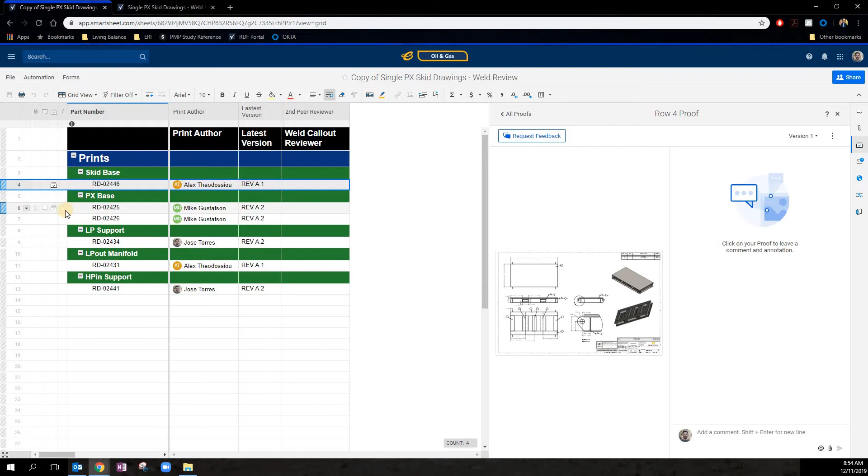We can do that by clicking here. We have these taskbars that open up. We can either upload a file by navigating to it directly. So this is my projects folder. I'm going to go on general projects, SPS drawing pack, and for that one I think that was 2446. So I've uploaded 2446. Let's say I also want to upload 2425.

I can also do this by dragging and dropping. Let me get my windows here straight. So here, while I select this row, 2425, I'm simply going to drag and drop here.

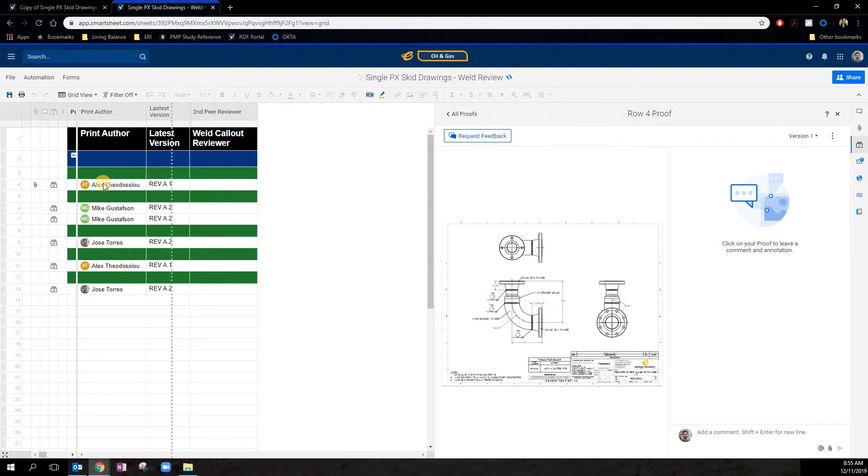So we can continue this process until we have uploaded all of the proofs or drawings that we need to review, and that's what I have here in this sheet. We see that each row can only have one drawing, and that's fine, that's all we need. This drawing has 2 pages, so it will also upload those 2 pages nicely.

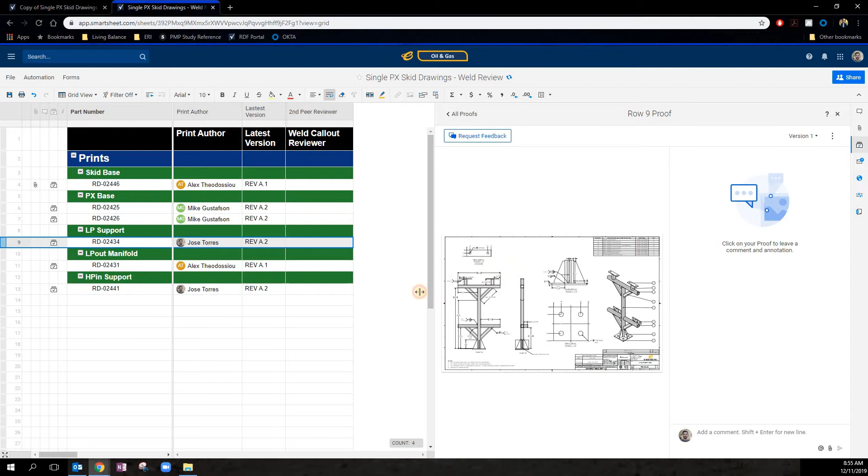Okay, so now that we have all of our drawings uploaded here, we need to start collaborating. In the first case, I'm just going to share this entire sheet with someone and ask them to peer review all of these drawings.

So I'm simply going to control copy. You can share sheets by copying their URL. I'm going to come here to my Outlook, start a new email. I'm going to email myself just so I get it. jtorres at energyrecovery, proofing request, please and thank you.

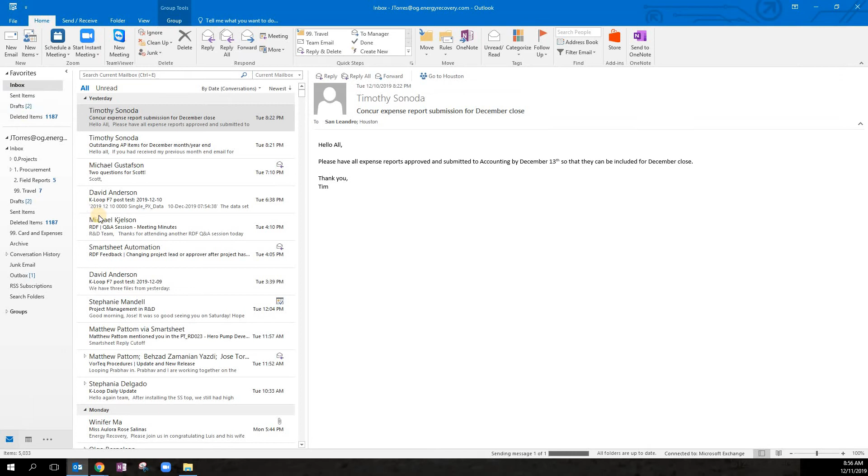Hello, can you proof the, let me get my spelling right, the drawings on this sheet? And on this, what I like to do is select this, then hit Control K, then Control V because I had copied the URL. So I'm going to send this to myself. I should get it fairly quick here while it navigates through the World Wide Web.

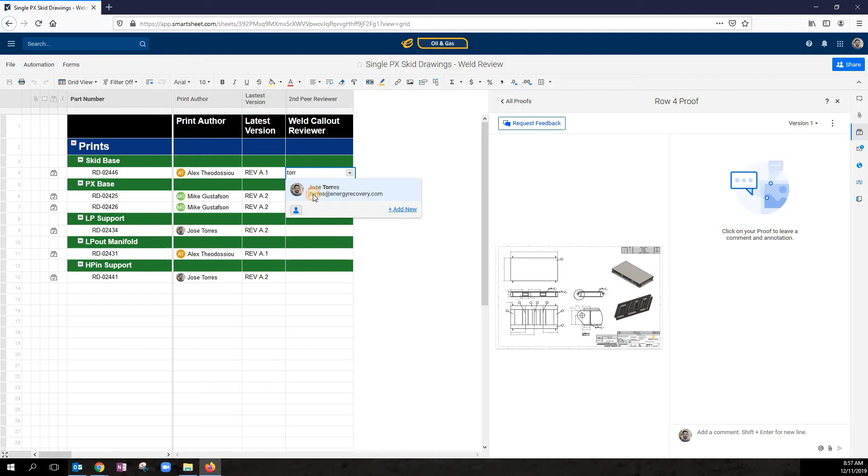Alright, so here, hello, can you proof the drawing on this sheet? I'm going to click on that. So I'm the recipient of this. I'll log into Smartsheet and boom, I have this. So let me take a look at this one. I'm going to put my name over here as the weld reviewer, and I'm going to open this up.

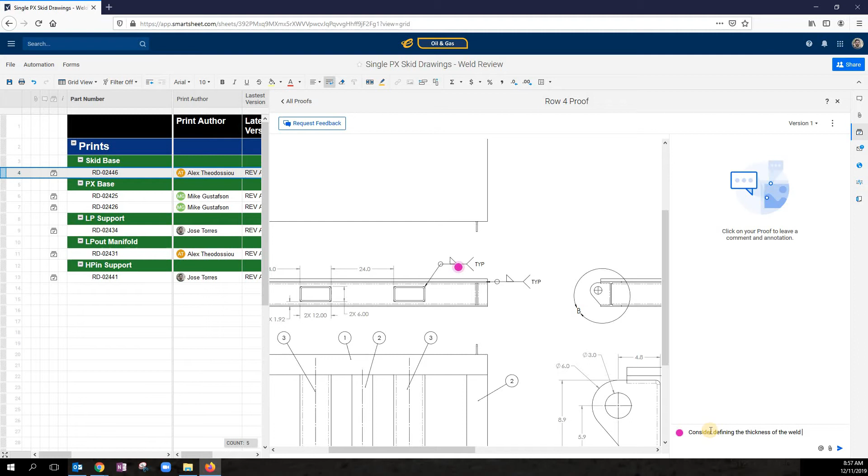And I can zoom in to the details here of the drawing. So here's the cool part about this: by simply clicking on an area, I can write comments about that. So I can say, consider defining the thickness of the bead of the weld bead. So let's say that's there.

And so then maybe I want to zoom out over here, and maybe I want to make a note about this callout over here. You can also use the mention functionality here, so I can mention, for example, Torres - again, I'm mentioning myself, this is going to send me a notification. So, hey Jose, consider using a different type of weld because of the lack of space here.

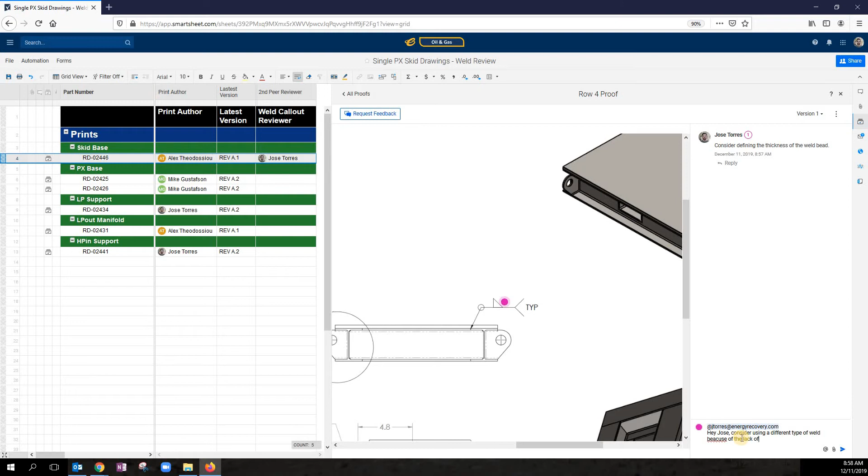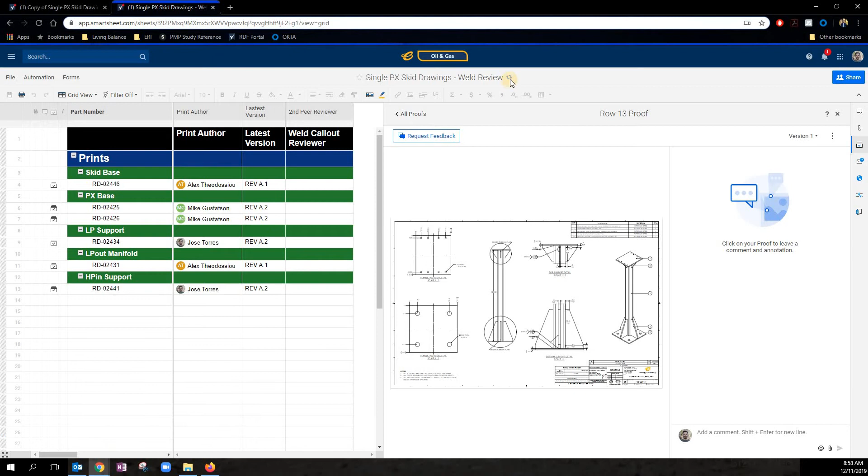All right, let's just put maybe one more comment, maybe update the correct quantity. Alrighty, so we have 3 comments. I'm going to go ahead and save this sheet, and then go back to my original sheet, which is over here. When I refresh this and go back to this proofing, boom, I automatically have all the comments that Jose Torres made, and this happens pretty quickly.

I can reply to this and say, yup, will do. Or here we can say, no, this is actually fine, thanks. So on and so forth. This is a way we can collaborate amongst each other and quickly turn around peer review processes.

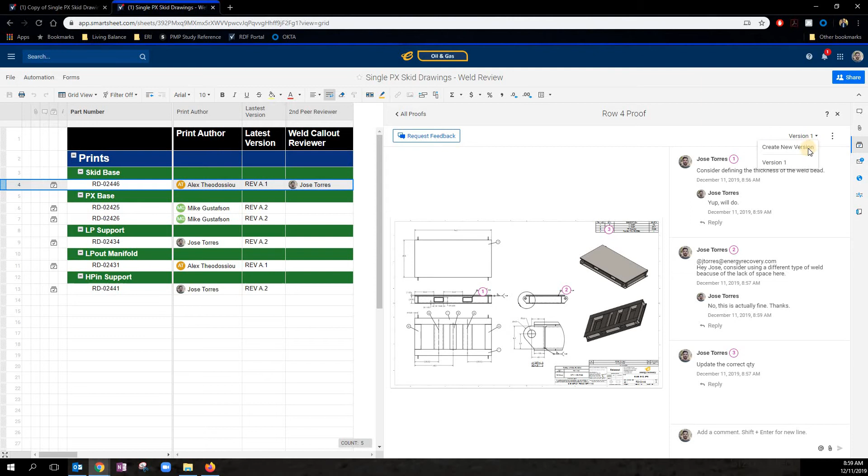Another cool thing about this is that if I go ahead and upload another drawing into the same row that already has a drawing, it's automatically going to add another revision. For example, let's pretend for a minute that I already made all of these 3 changes. I can come over here and create a new version, and then upload a file. Let's just say this is the new file. Of course, these are 2 different parts, but for the purposes of this video, we're going to see that version 1 is locked up.

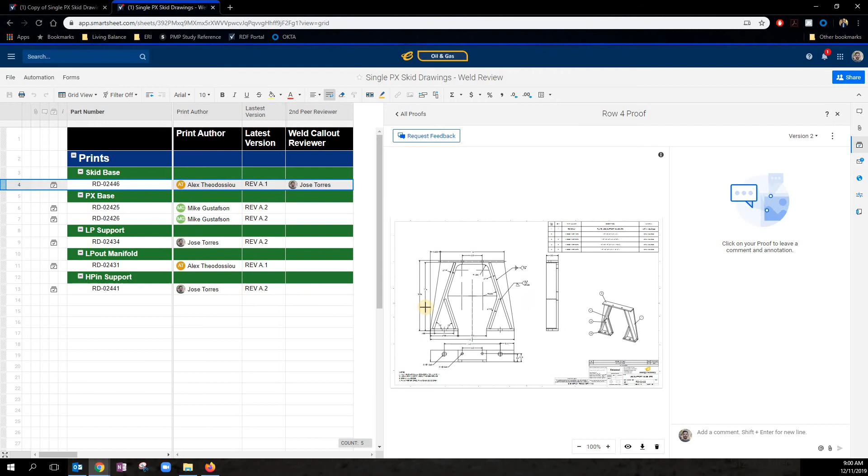Nobody can write any more comments on this because this version has already been revved up. But we should have both versions, version 1, which is view only, and version 2, which I just uploaded. So this is one way to do the review.

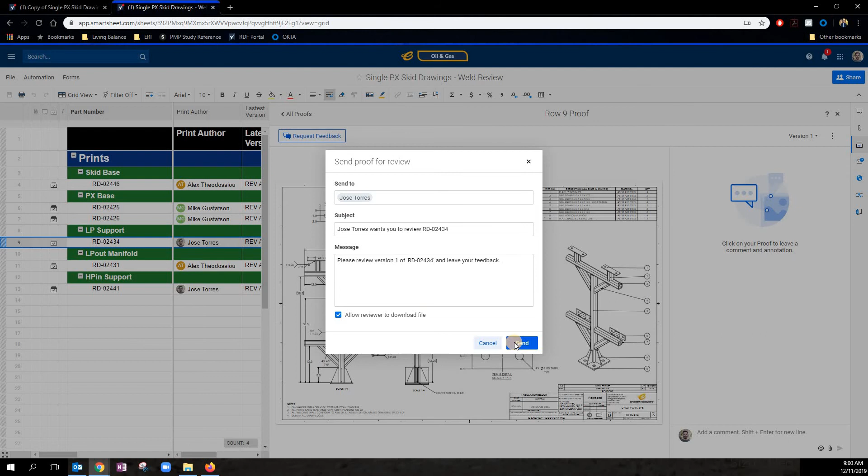If, for example, you need feedback on a specific review, not on all of them on a sheet, or if you need feedback from different people for different reviews, then you can go ahead and click on that one single sheet and request feedback. Again, I'm going to use myself, Jose Torres. This is going to achieve the same functionality, but in a slightly different manner because I have officially requested feedback. Now I have here one response pending.

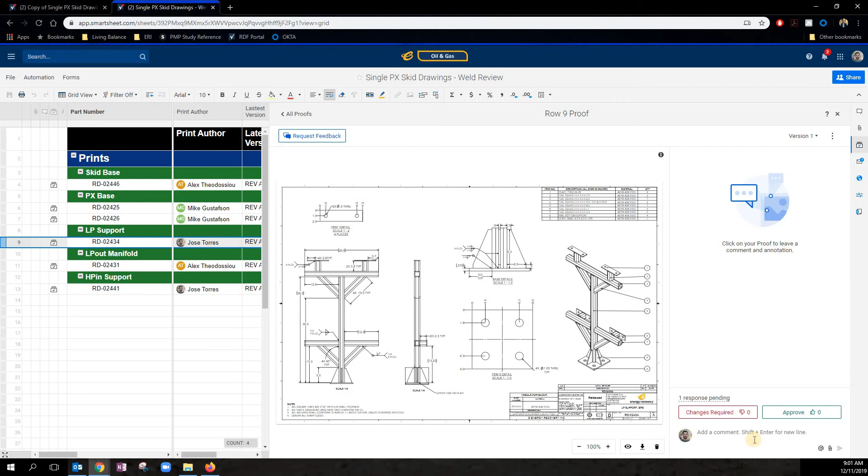So this is, for example, if we want to get final approval from our supervisors, once for the final review, maybe I can request feedback, and then that person is going to get an email that's going to prompt them to take action on this drawing. We'll see that email.

So, okay, I got this email from Smartsheet: please review version 1 of this drawing, review proof. Here I'm going to be brought into a slightly different screen. This one is a lot easier to review.

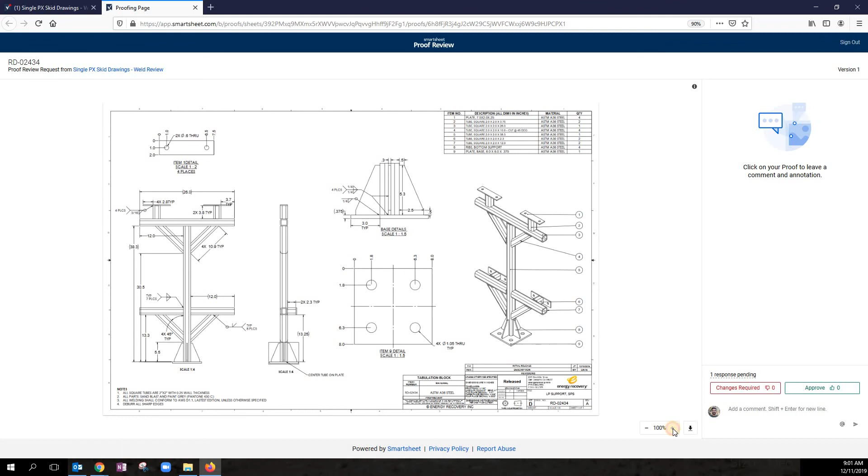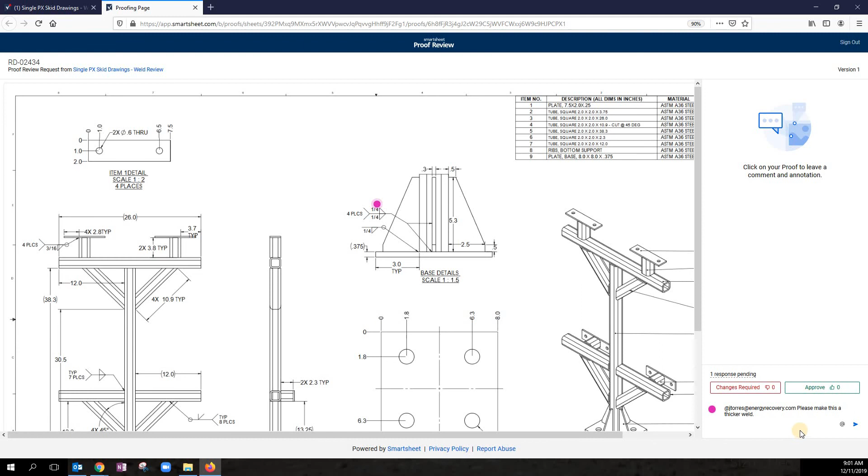And to annotate. So again, focusing on the welding callouts, maybe I can mention over here, mention Torres: please make this a thicker weld. We'll comment on that one. Maybe we can say on another weld, consider making this a complete joint penetration weld.

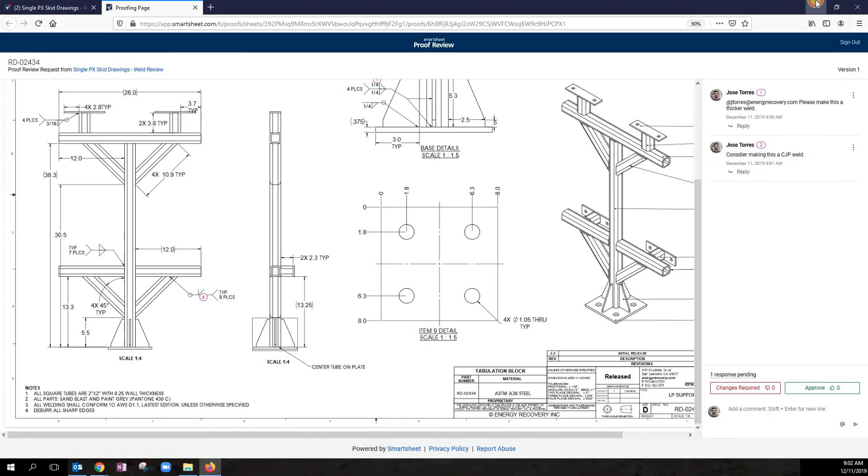Okay, so all of those are saved, and then when I go back to my original Smartsheets, if I hit refresh and navigate to that same drawing, notice that the 2 changes or 2 comments that I made are already reflected here. And better yet, we can either approve, change, or require more changes here.

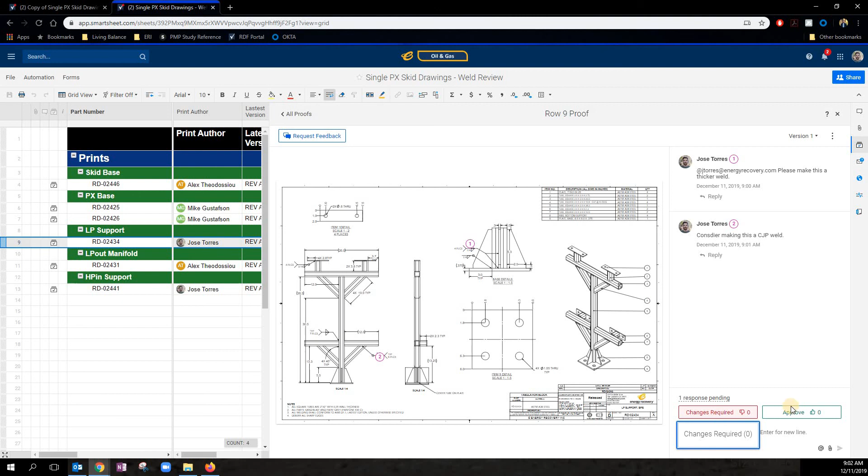So I hope you have enjoyed this video. Again, this is a functionality in Smartsheets that will greatly facilitate peer review processes. A caveat is that only if you have a business license can you activate the proofing feature. However, anybody can use it after it has been activated.

So again, only the business license users can upload drawings and activate the proofing, but once all the drawings are uploaded, anybody with a free license can use it.